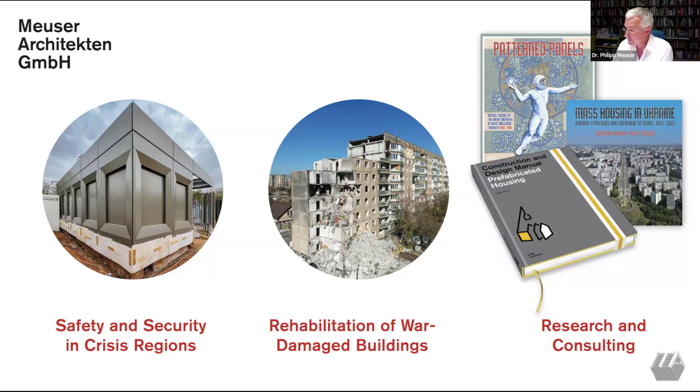So I'm talking about rehabilitation of war-damaged buildings, and please expect three parts of my lecture. The first part is about the reconstruction of the building. Before I talk about what we are doing from the point of engineering, architecture and construction, I think I have to talk about the term rehabilitation.

So what am I talking about? In rehabilitation, is that also modernization? I say no, I'm not talking about energy modernization. I'm talking about rehabilitation, and rehabilitation means the part starting from the destruction of a building and allowing people to move back into the building and repair the infrastructure. We are not starting with modernization or restoration of the building.

Just this short period between destruction and allowing the people to move back, and this is quite important. What we are doing in this period is also very important, because we prepare the building to simplify or to ease the modernization at the next step.

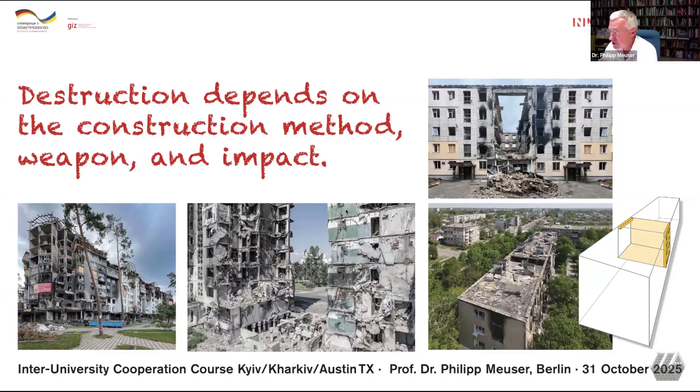And the difference, of course, is not only the kind of weapon, but also it very much refers to the kind of construction itself. I'm showing this because we are always asked, how can we strengthen residential buildings against weapons of war? My answer is, sadly to say, it's not possible.

You know all these examples, residential buildings or civilian buildings destroyed during civil war or war. We have examples from Grozny, Aleppo, Mariupol, all three destroyed by Russian military. And we have to say, or we know, that residential buildings, civilian buildings are not built to respond or to stay against weapons of war. So this is a fact.

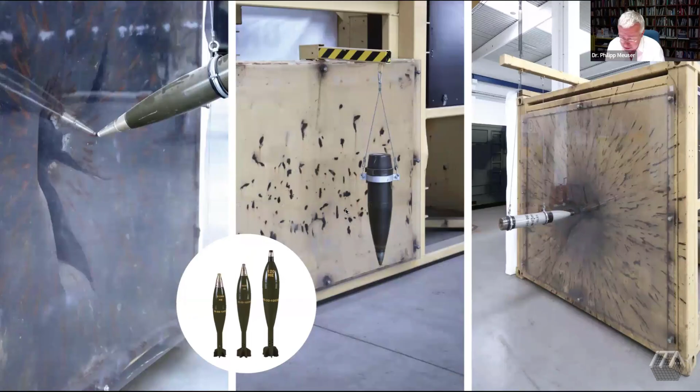If we would strengthen our buildings against weapons of war, they might look like this. These are examples of containers from military infrastructure. You can build steel constructions, mainly double-walled container buildings with special reinforced steel. But in the end, those buildings don't have windows, and in fact they don't have any quality of living.

And this is, I think, the big conflict we have. On the one hand, we try to stay away from all this destruction, we try to save our lives. But on the other hand, we don't want to live in a bunker all the days and every time. We want to also celebrate public space, we want to celebrate the quality of a European city. So this is the conflict we have. And even in times of war, it's always difficult to find an answer.

And we also know these examples of collateral damage. This is just a diagram based on one of these high-rises in Kyiv, standing close to the inner city airport. In the first days of war, this, I have to say, it's an iconic building because it was hit by a missile, and you see how this big hole was in this high-riser. So, of course, this is what we assume: the target was not the high-riser, but the target was the close airport, and definitely this was collateral damage.

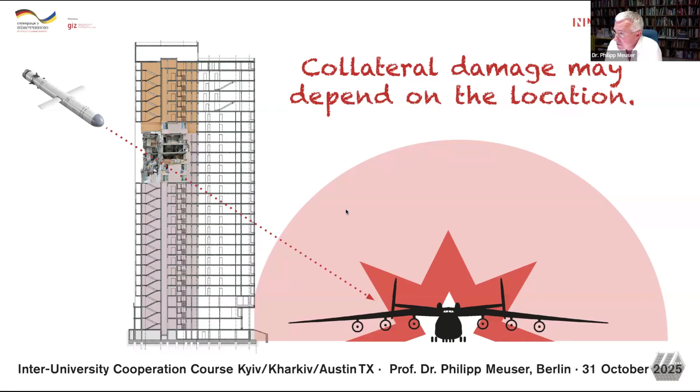And of course, there's always the discussion that collateral damage may depend on the location. This is correct, this thesis or this sentence, but not always.

And now we come to Kryvyi Rih. This is the first pilot, or the first building we are talking about, and it's called Ukrainska 55 — the Ulitsa Ukrainska building number 55. On the left picture, you see how a missile, shortly before it exploded, was flying directly into the building. So we cannot say that this is collateral damage. No, this was a direct attack, maybe randomly, but it was a direct attack to a 9-floor panel building built according to series 94.

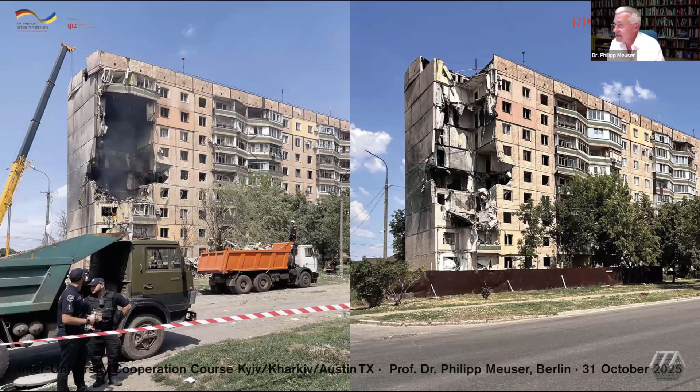This is how the building looked like when we came into the project. On the left-hand side, this was just some hours after the attack. On the right-hand side, the building exactly 1 year later. The attack was in July 2023, and it caused several death cases. Some people died in the building. On the right-hand side, the building looked like a ruin even 1 year later.

Not nice to see. Of course Kryvy Rih, as a city, has witnessed many destructions. Up to 20% of all residential buildings in Kryvy Rih are damaged or destroyed. This is more than the average in Ukraine, which is around 13%. 20% have been damaged in Kryvy Rih so far.

So now came the question, what to do with this kind of damage? We have a 4-section building, 9 floors. What was interesting to understand was that we had 2 double sections, not 4 single sections. On the left-hand side, you see already the problem.

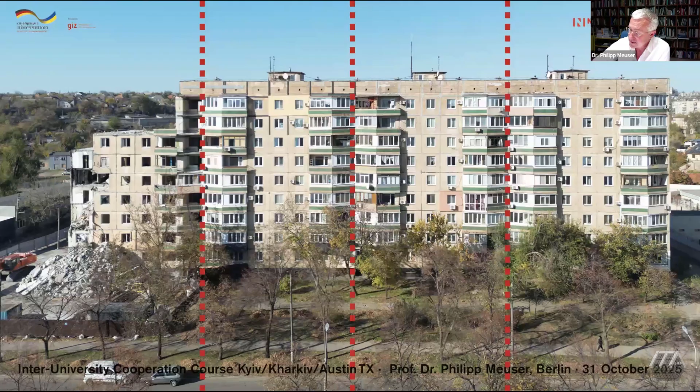And I'm talking about construction only. If I talk about the legal issues or the issues of ownership, the owners of these buildings were compensated with $25,000. They received the money, and $25,000 was an equivalent for what people could buy another apartment in Kryvy Rih. These figures might be different in other cities, but in Kryvy Rih in 2023 it was $25,000.

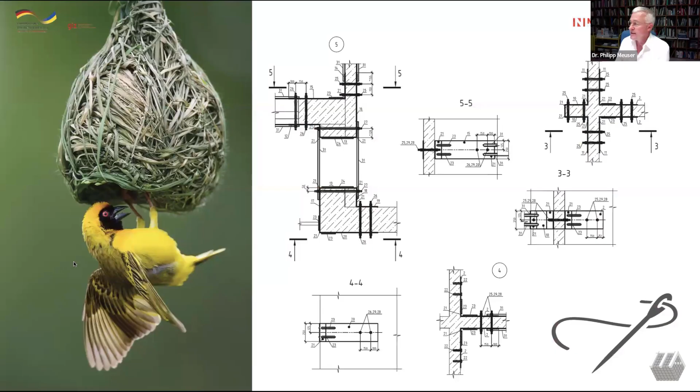This was because, from a construction and engineering point of view, this was the idea. We used this yellow part of the building, which was empty, to stitch it like a bird's nest with steel bars. You see that here, partly - the steel bars which were welded on the corners, and then connected with each other, not only parallel to the wall, but also

deep inside the wall, including some additional steel frames. This was done just to reinforce the remaining half section. And it has been cut by a diamond saw. This was also new to us.

You could not just take a crane and try to pull it out, because as we know, the engineering or structural system of a panel building very much depends on the welding of all the steel joints of that construction method.

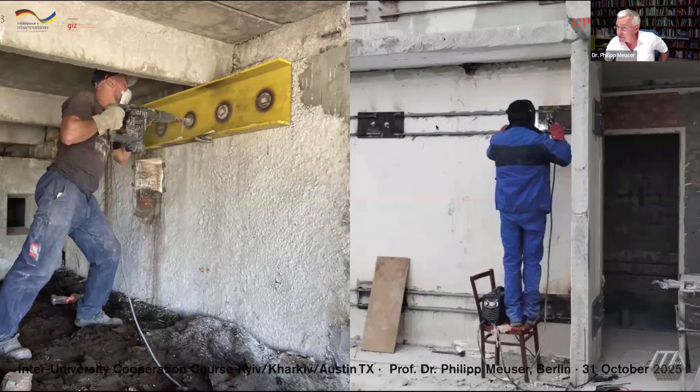I'm not talking about design or any aesthetics here. Everything was done in a very raw way, because the main priority was to rehabilitate the building so that the remaining or neighboring section would be less risky to live in after we took away this remaining 4th section. This is what was done. It's a very rough construction, and you would not expect these kind of pictures when I tell you this is about a residential building, because for residential we always try to make it as nice and livable as possible. But not in this case.

Priority number one was to reinforce the remaining building so that people could stay and live there in their apartments. This is after 1 year, so it took quite a while. On the right-hand side, you see the building after the fourth section was taken away. And from the building physics perspective, we have another challenge, because now we have a former interior wall which becomes the outside facade.

So the next step, which is happening currently, is to do some thermal insulation in this part of the building. This might be interesting for you, because of what was written into our contract with GIZ, the German agency for cooperation. When we work with international donors and European clients, it's not only about reconstruction and repair, but also to go beyond and think: can we recycle debris? What to do with all the panels that were taken away? Can we allow ourselves a special thermal insulation, not the conventional way, but using hemp, straw, or some alternative material which also strengthens decarbonization?

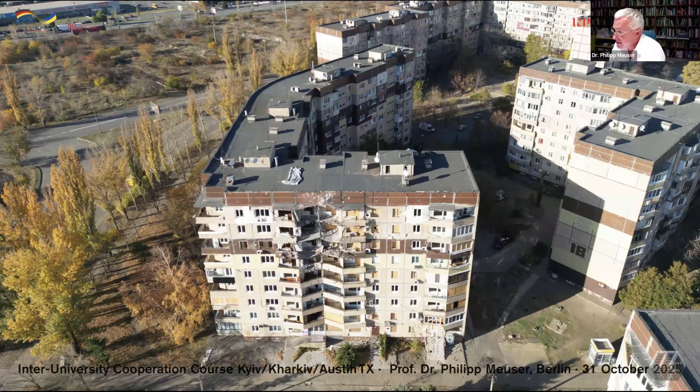So this is the building itself. It has several sections, also with a curve in the shape of the building, quite an unusual shape. There are 172 apartments, and nearly 20 apartments were hit or damaged by this huge fire. When we talk about a fire causing damage for 6 to 8 hours to concrete, in fact, any engineer will tell you we can't prove the strength of reinforced concrete anymore once it was under fire for several hours.

So you see how it looked like. We had to find a solution for what to do with these parts of the building. This is another picture of how it looks inside. Initially we had the idea - why not use some panels from this Ukrainska 55 building, take them out there and try to fit them, or use them for this building.

So this was the initial idea when we selected the pilot projects. I very much tried to find two buildings of the 94 series, just to think about whether we could use old panels from another building and use them in this building. I can tell you, this is the experience we have from Kryvy Rih - forget it, it's too complicated. Try to find another solution.

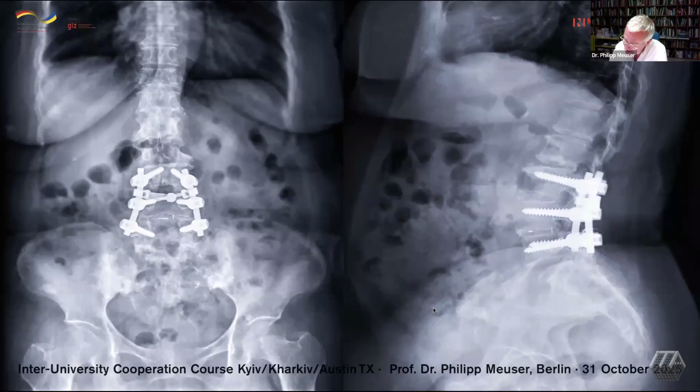So what we are doing - in Ukrainska 55, we were stitching the remaining parts like a bird's nest. But what we did here in Birkuna 8 is different: as if you would have a skeleton of a building, inside the skeleton we put a new steel carcass, a new steel skeleton, built inside the building. This is just the method - it's not a real drawing, and this is the problem.

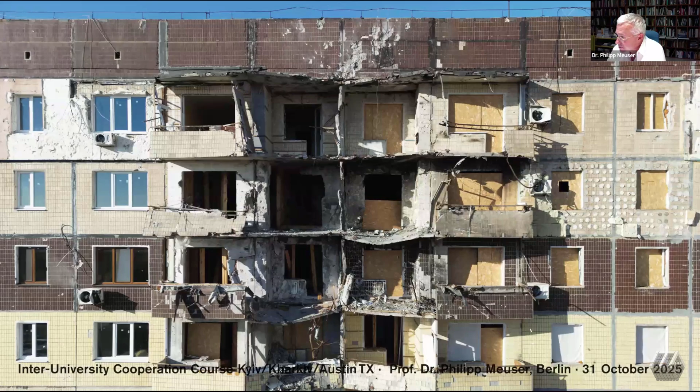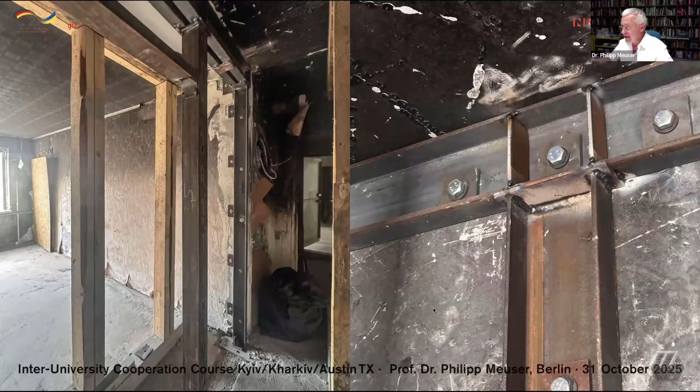So we have this facade partly completely destroyed, and we don't know about the strength of the building itself, the load which can still be used for this building. That means inside the building we had to install a new skeleton out of steel.

You might know this kind of construction from industrial buildings, or post-industrial buildings which have been remodeled as a cafe or an arts center. But here we are talking about residential buildings, standard apartments in a panel building.

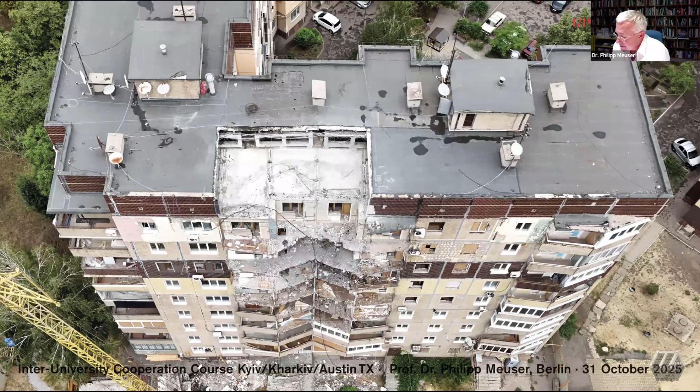You see still very rough everything, and then partly the building was dismantled, especially in these parts where the panels were completely destroyed and where restoration or repair would not have made any sense. I told you already, we did not replace the old and demolished or damaged panels by new concrete panels, but we used a new method.

The remaining parts, or these new parts, have been built out of steel - a steel carcass put into the building itself, then filled with standard concrete blocks. This is a process which is still ongoing, work in progress.

These pictures have been taken just a couple of weeks ago, and we expect the final steps by the end of this year. By then, we will have worked more than 1.5 years to repair this part.

Just to give you an idea how long it takes. For Ukrainska 55, it was one year, nothing happened. Everyone was in a kind of shock. Then after one year, we came into the project. It took around one year to demolish the part, because you have to plan it. That's important, you have to plan it, make a calculation, make a tender, and then do the works itself.

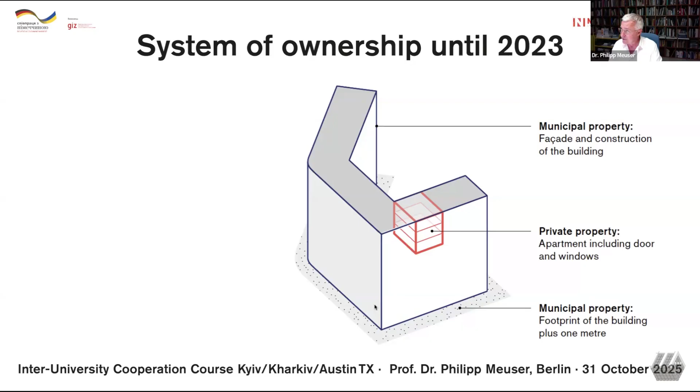But for the last two years, other ownership structures are possible. That means if there is an OSBB, the OSBB can apply for receiving ownership of the shell — the facade, the roof, the basement. And the OSBB can also apply for the land. So that means the individual apartment, the facade, plus the land belong to one OSBB.

And this is also something I learned recently: it's also possible that the OSBB gets a lease contract from the municipality so they can rent additional areas like green areas, or parking structures and parking spaces. So the ownership is in the hands of the OSBB.

This is what I was talking about — the modernization and transformation of the housing stock in all of Ukraine. I think this is very important if you would like to start a successful method of modernizing all these old Soviet apartment blocks, because everything is about ownership. This is something I learned in my first year in university. As an architect in Germany, you learn from the first moment that the most important question in architecture or urban development is always: who owns the land.

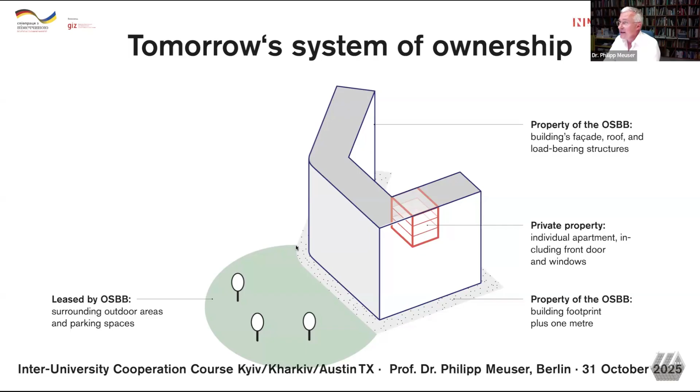So that's one part. The next part is that Ukraine has a very diverse system of funding programs to modernize multi-story apartment buildings. There's nothing you need to invent new, because main programs already exist. Of course, you have the program Vidnovy Dim for rehabilitation and modernization of the apartment itself. But there are also quite advanced funding programs for energy modernization, like the Energodim project, and also the Greendim project for renewable energy systems.

So these funding programs exist, but what's missing, according to my research and experience, is that the OSBBs or the residents themselves don't know in detail how it works. That means this could be a completely new field of profession in the future.

This could also be a field of profession for engineers and architects, not to work as a designer or engineer, but as a consultant for OSBBs or other legal bodies, to consult how to implement a modernization process, how to install renewable energy systems on the roof, and how to finance this.

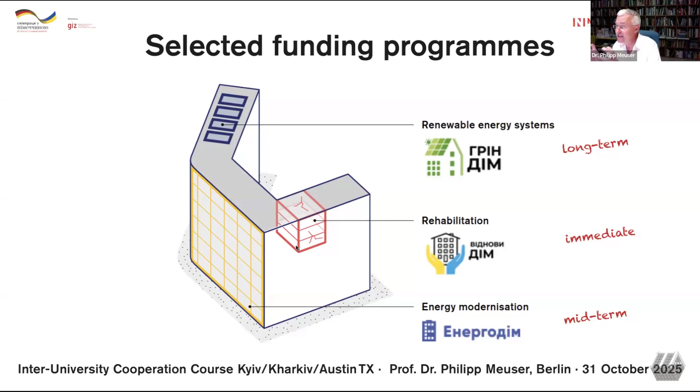But I'd assume not all OSBBs or potential target groups know what they could do. So we also produced this diagram, because whenever I try to explain how energy modernization works in Ukraine, most people don't really understand the system, and here on the right hand side we try to explain how it works.

I take in this case just an abstract amount of 1 million hryvnia. That's not so much, I know, but at least let's try to calculate with 1 million hryvnia. If I take 1 million hryvnia from a bank and try to refinance this by saved money, which I'm going to save on energy because of new insulation on my facade, which costs me 100%.

If I take 1 million hryvnia from anyone, or have it in my treasure, it would take 25 years once this investment has been returned. And the return of investment is not by receiving money, but by saving money.

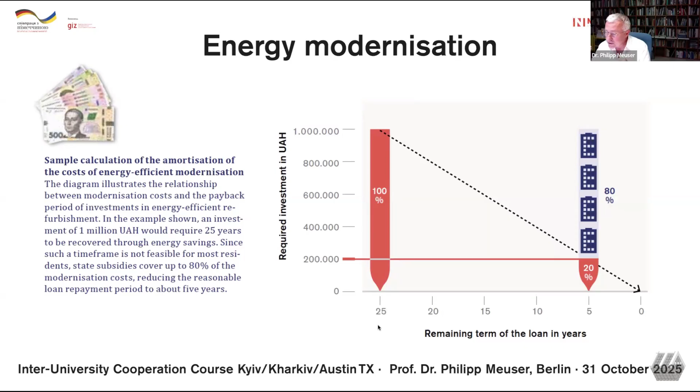So the aim is we have to convince the OSBB to apply for full ownership of the building itself and of the land, plus convince the OSBB to apply for funding for energy modernization of the whole building. I know this is very abstract, but it's so important. The message is, if we talk about rehabilitation, don't think only about materials, recyclability, decarbonization and nice facades - also think about legal issues of ownership and the funding itself.

And the third part I'd like to talk about is social issues and participation, because I had quite a positive experience. When we first met this homeowners association from Birkuna 8, everyone was very interested in what we were going to do there and how the process was going.

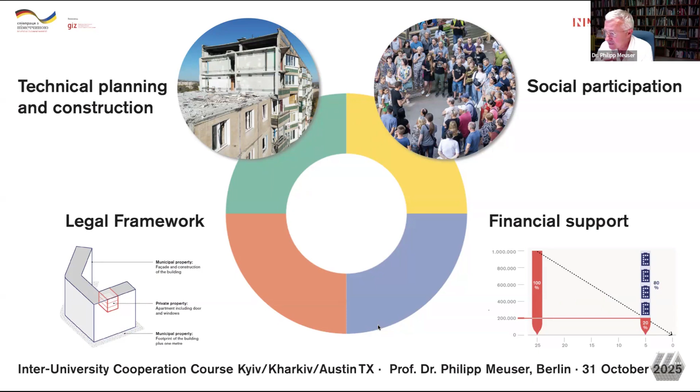And in the very end, to talk about financial support, also to make this jungle of possible funding programs break it down and allow an OSBB to apply for some money. So this might be interesting for you to download.

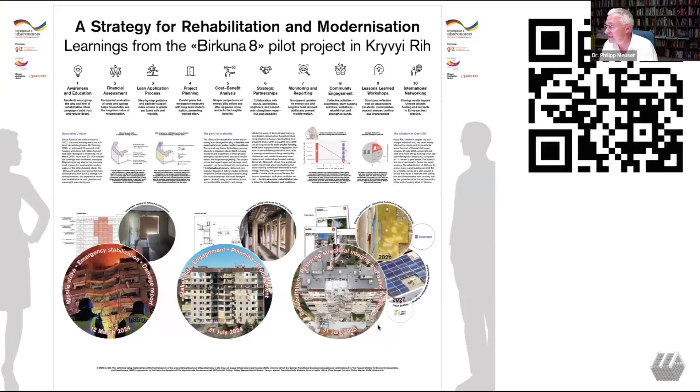This is a poster we prepared for the Ukrainian Resilience Week lately. This is a QR code to download an English poster, and this is the same in Ukrainian, so you can also download it. And this is the download for the preliminary report, which also includes the two posters I was just showing.

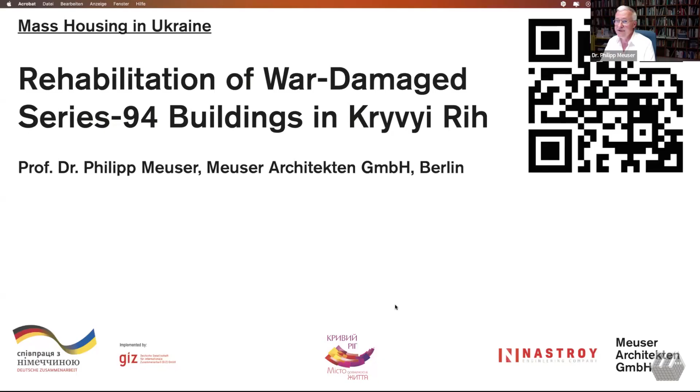So this is the first experience we had from our pilot project in Kryvyi Rih. Thanks for listening, and I'm ready to give some answers, or if you have comments, or know of other pilot projects in Ukraine where we can start an exchange, I would be very happy to learn about.

Thank you a lot, Philipp, for your lecture. It was very, very impressive, warm, and sensible. First of all, I want to ask you about our time, how much time do you have for answering questions, so that I can facilitate our communication in the right way.

Yeah, we can have another 20 minutes, no problem. Okay, 20. And maybe, because I'm a facilitator, I want to ask a question from my side.

Part of my family is from Donetsk Oblast, and now they're in a small town, not a big city, near Pokrovsk, and it has been almost completely destroyed. My part of my family had to leave their place, and I have two questions.